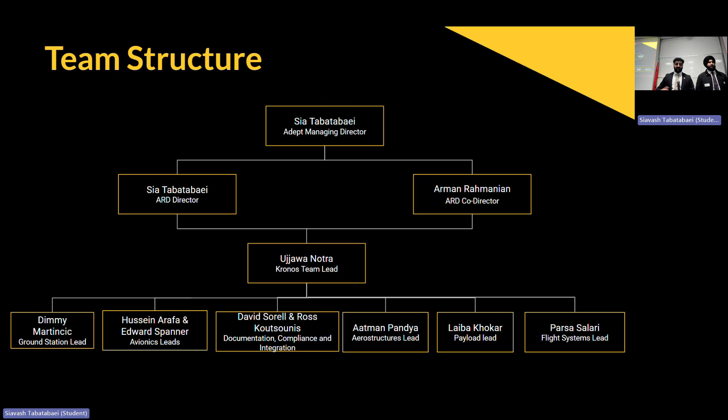So a little bit of an update since you guys last heard from us. In 2025, we competed for the first time since 2019 in the Australian Universities Rocket Competition. We're pretty proud of our performance. We came 4th place in 2 categories. So the rocket that you see behind me and the rocket at the front, Project Myriad and Project Lightning, were our 2 entries into the competition. Both categories, we came 4th place. I should note, we were coming 2nd place up until launch. The reason I say that is it reflects our team's capability, and the one part that is particularly resource intensive in terms of investment into actually building the rockets, that part we're still learning, we're still improving.

We also walked away with the Lockheed Martin Technical Excellence Award. Again, really speaking to our team's technical capability in presenting their work and being able to talk about what they're doing, and also following engineering industry standard practices and processes. Since then as well, we've grown, we've doubled in size. So from around 40 active members, we now have 80 active members.

And our big focus this year is formalized engineering processes. So taking our learnings from last year, all of the little intricacies of running a large scale project, figuring out how we can improve those, and allowing our team to walk away with real engineering processes and documentation and simulation and analysis skills, rather than just saying, yep, we're building a rocket, it's a tube, it's got a nose cone, let's launch it. So we want our team to really have that employability behind it. Some of the photos here you'll see are Project Myriad in action. And yeah, very, very happy team.

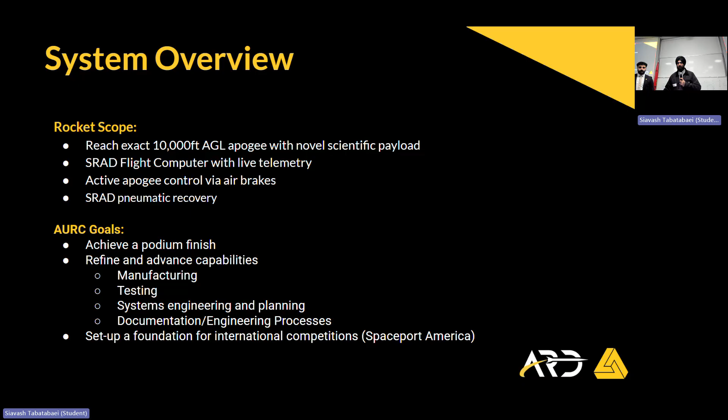So introducing Project Kronos. As you can probably see, the main geometry and dimensioning is very similar to Myriad from last year, but we are planning on adding a boat tail, a metal nose cone tip, and a different fin shape to get us to that extra apogee. And now I'll move on to the subsystem review.

So aerostructures this year is mainly focused on implementing industry-standard manufacturing techniques. Flight systems, which encompasses our air brakes and recovery, are working on developing a working altitude control, and recovery is working on making an SRAD pneumatic recovery. Avionics is working on, sorry.

Quick question on terminology. SRAD? Oh, sorry. Student Research and Development. Thank you.

Avionics is working on a student researched and developed flight computer. Ground Stations is working on live telemetry capabilities, which are new this year. And Payload is also working on an SRAD scientific payload, which is being developed in-house for the first time. Now I'll hand over to Aerostructures.

Oh, sorry, ConOps. So just to walk through the concept of operations. So generally in the AURC 10,000 feet category, we take our rocket to the launch pad and activate the avionics. This installs the igniter to the motor, and once continuity is checked, the motor ignites and the rocket launches.

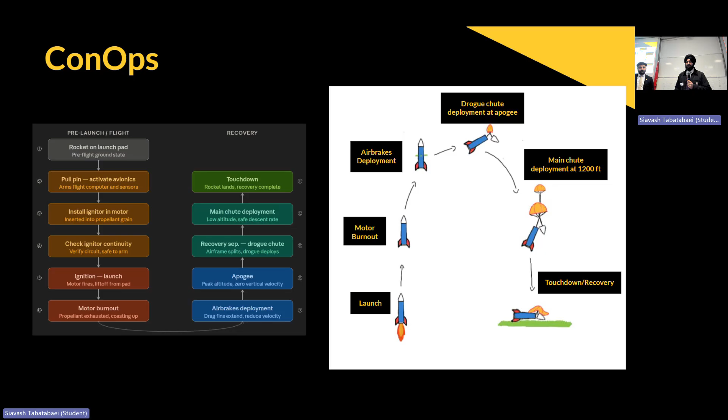So guys, I'm Aatman, the team lead for Aerostructures, and I've got Urvi and Noah next to me, who are members. So for Aerostructures, we started off with the system requirements from AURC, which are our external system requirements. This would include some safety stuff that they want, such as the touchdown velocity, the rail departure velocity, the aerodynamic stability margin for the rocket, and the mechanical safety factor they expect us to use.

We also have internal system requirements, such as the internal diameter and the motor class that we're using. These are mainly due to us reiterating on the design from Myriad, and this will allow the other subsystems to start their design process earlier on due to some consistency between Myriad and Kronos.

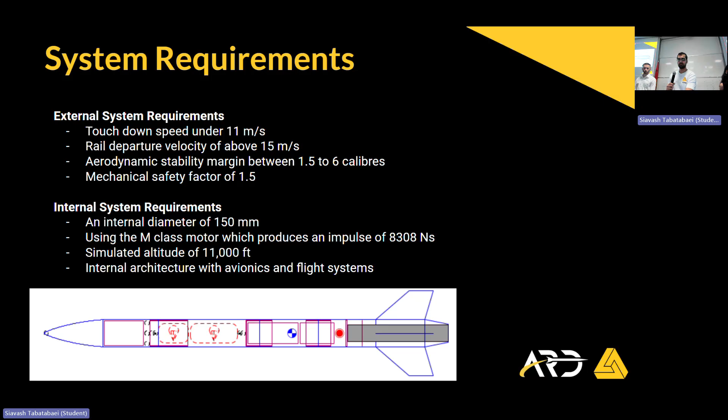So if we have a look at the system overview, I've just got a few dimensions that are constraints for the subsystems to adhere to. This allows us to package the rocket before we start going into the manufacturing phase, and this is supposed to be like a largest value you can go to. So they can optimize it further, and we can get the rocket down to be shorter. But yeah, we also have a boat tail for this year, which is supposed to be reducing the low pressure drag from the end of the rocket.

For the flight profile, when we launch, the rocket motor ignites. This gets us to apogee. At apogee, we have the separation event with the coupler system, and a drogue parachute is released. A drogue parachute is basically just a parachute which is smaller. Therefore, it increases drag, but not to such an extreme position where the rocket can fly away further from the launch pad. Then at a certain altitude, we deploy the main parachute. This main parachute is supposed to be increasing the drag overall, so it lands at the certain velocity that we require.

So in terms of manufacturing, we've come up with distinctive methods for each part of the rocket. For the nose cone, we'll be 3D printing a split mold that will be sanded and waxed from the inside to make sure it's smooth. Then the female component of the mold will be fiberglass, and that will be a separate layer, and then epoxy will be added on. So there's 2 separate layers for it. The male part will then be added on with a vacuum bag to make sure there's no air bubbles left or any voids.

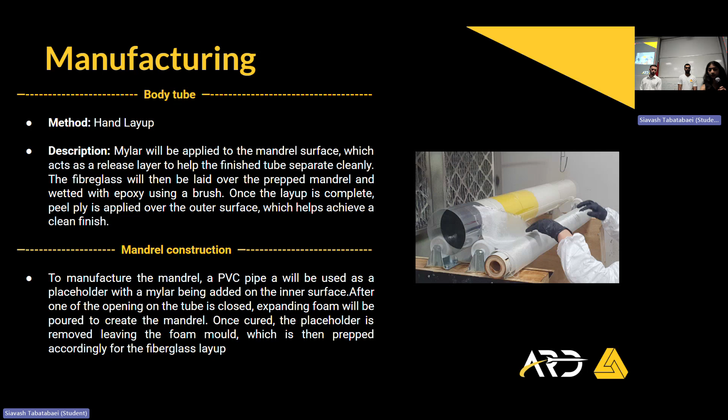Now, fins are one of our major differences from Myriad this year. We're going with trapezoidally swept back fins. And we have 2 iteration stages that you can see up there. We originally decided to go with an aluminium honeycomb core structure, which will have either an MDF or plywood frame that will be tip-to-tip reinforced. But a major issue with this is that aluminium honeycomb is extremely hard to shape and bond. So this increased the chances of manufacturing inconsistencies in our design, which we obviously do not want.

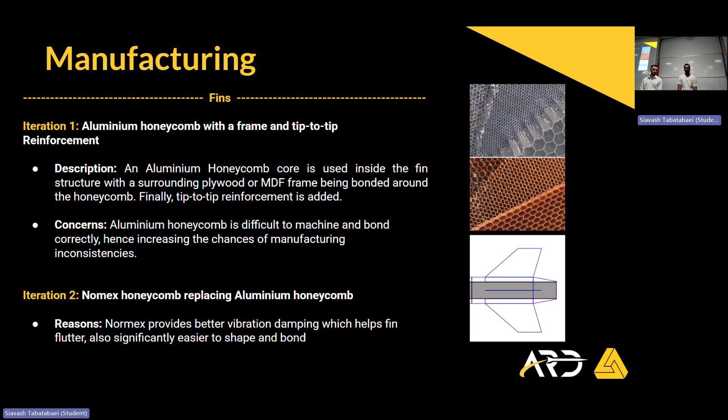So as an alternative, we came up with Nomex, which still has the honeycomb structure, but it's a lot easier to shape and bond as compared to aluminium. It also has better vibration damping, which helps with the fin flutter.

Moving on to centering rings, we'll be using MDF sheets that will be laser cut to our design. And finally, for the bulkhead, we'll be going with CNC routing. So a CAD model that includes all the through holes, all the U-bolts, avionics wiring, recovery harnesses, and everything will be CAD'd up. Once that's been done, we'll be using aluminium 6061 to manufacture the bulkheads.

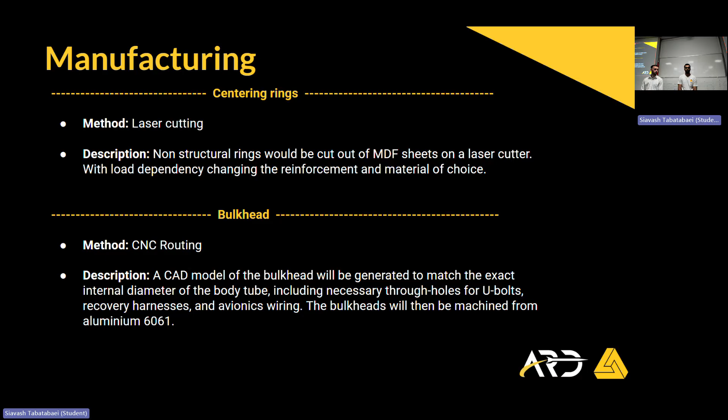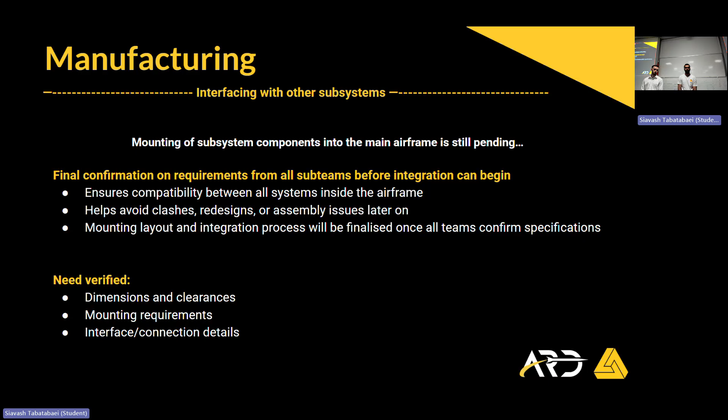Now, in terms of how we're interfacing with the other subsystems, to be able to actually confirm our method of interfacing, we need confirmed dimensions and clearances from everybody. We need mounting requirements and interface and connection details. So once that's been finalized within all the other subsystems, we will finalize our method of interfacing.

Now, finally, the major differences from Myriad to Kronos this year. As I've mentioned, we've reduced the wall thickness from 5 mm to 3 mm. We've had other rocketry teams that have used a much thinner wall and still have succeeded in it, so we're hoping that works for us too. The fin shape and material: as I've mentioned, we're going with swept back trapezoidal fins this year with a honeycomb structure. And again, we have a boat tail.

In terms of manufacturing, we're introducing vacuum bagging, which we haven't done previously, so that's something exciting. And you would have noticed in our OpenRocket file that some of the parts are rearranged. This is because as we're going with single separation deployment, our parachutes have to be adjacent to each other. Therefore, the avionics bay and air brakes have had to move aft.

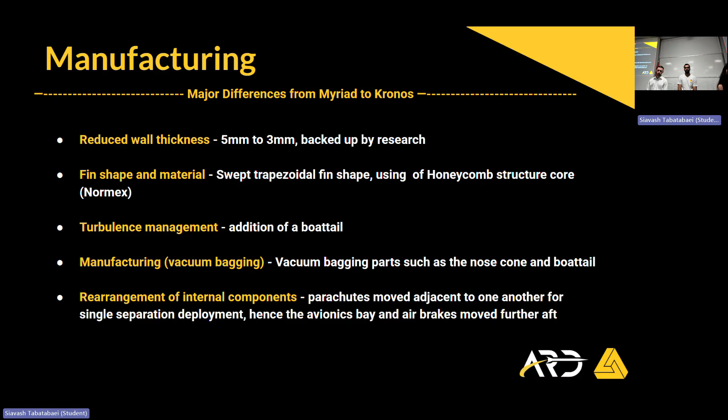For simulation work, we're going to be using ANSYS as the major package with Fluent and Mechanical and Composite PrepPost. The ANSYS Fluent campaign we're running will mainly be focusing on the camera mount, because we will have an internal camera pointing towards the air brakes. This will allow us to see how the air brakes are functioning, the input versus the output itself. We'll also be looking at the airflow from the camera mount and how that affects the air brake system as well.

For the boat tail, of course, we need to check how effective the boat tail is in reducing the low pressure zone behind the rocket. And we'll also be investigating how side slip affects the stability of the rocket.

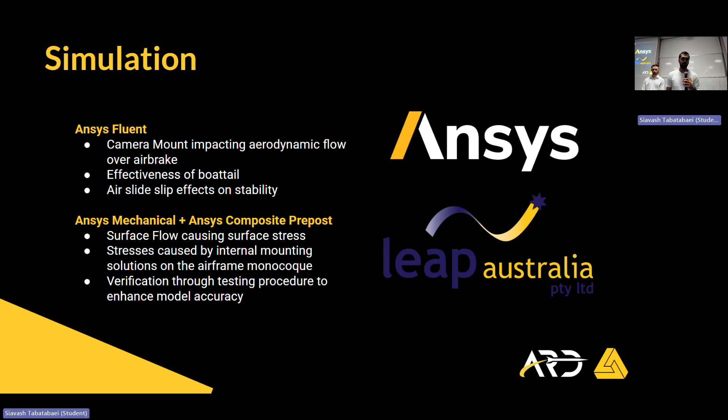For the Mechanical and the Composite PrepPost campaign, we'll be running a surface stress comparison using the CFD model to simulate the surface flow. Then we'll also be looking at how the internal mounting solutions per subsystem affect the overall stress on the airframe monocoque. We'll also be verifying all the mechanical processes through testing.

Right, so for physical testing of the rocket, there are 4 main components we're going to be testing: the aluminium tip on the nose cone, the internal bulkheads throughout the rocket, the fins, and the airframe couplers. For the nose cone tip, we are going to be doing tensile testing just to make sure that the forces we experience during the flight and separation with inertia, we can actually handle based on the adhesion that we apply to it.

In terms of the bulkheads, we'll be doing compressive testing internally to make sure that the actual force from the motor doesn't affect it and it actually maintains its position in the rocket. And then also importantly, tensile testing on the bulkhead near the nose cone, because during separation, we want to make sure that the bulkhead maintains its position during the force that we will be experiencing during that separation.

Now, for the fins, we're going to be running cantilever testing to make sure they can handle the forces we're expected to experience during the flight. And for the airframe couplers, we're going to be running both compression and tensile testing to make sure that during the flight, when it's going up, we can actually maintain the compressive force. And also during separation, we will not be worried about the tensile forces there either.

A few project risks for the sub-team are manufacturing complexities causing time delays. This can be mitigated by using smaller scale manufacturing initially to iron out all the manufacturing processes. Then we also have an integration challenge with the sub-teams due to time, basically. But we'll be starting discussions after the CDR is concluded, and this will allow us to design everything hand in hand so integration is as quick as possible.

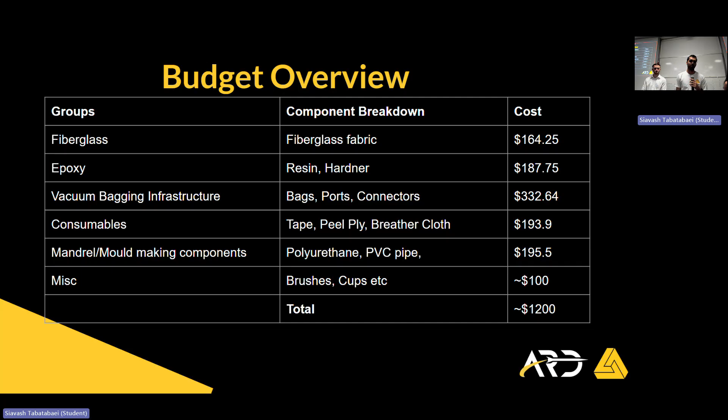A quick budget overview. Yeah, majority of the pricing is just on materials such as fiberglass and epoxy. A new category within the budget is vacuum bagging infrastructure due to us not really having that right now, and also the consumables that go alongside it. However, the mandrel making process seems to be fairly cheap for us right now.

To measure performance within aerostructures, it's pretty simple, I think. Basically, we need to meet system requirements like all good engineers. We need to make sure that the integration side of things goes as smoothly as possible. We need to establish good manufacturing capabilities that we can pass on to the next year and ongoing years.

And then as ARD is a student-led team, education is always a goal of ours with transferring knowledge to newer members, and exposure to engineering experiences not found in university courses.

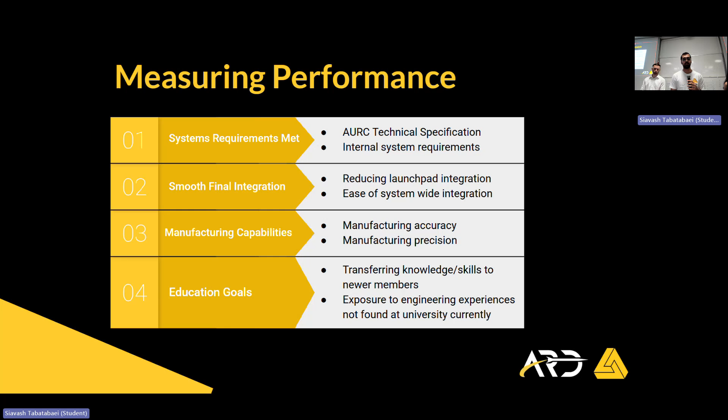If you just run through the decision, we're going from 5 millimeters to 3 millimeters on the body. Yeah, so when we were researching a lot of the airframes that other teams use, especially in Spaceport America, a lot of them were running either 3 millimeter airframes or 2.5 millimeter airframes. So we're trying to see how effective that would be with our current manufacturing technique and seeing if we can refine it further to get the necessary strengths we're looking for.

What's the advantage of going to that? You get more altitude, things like that. Yeah, so basically a simplistic way of dealing. I mean, you can if you want. So the safety factor on the 5 mil is a lot higher than it needs to be, so it's adding a lot more weight.

The issue last year obviously was that we didn't reach altitude to begin with. And that was due to weight, you think, rather than a difference in the thrust of the motor? So the thrust in the motor hasn't changed. Okay, so that's fixed. Yes. So as the motor is a fixed parameter, the most appropriate thing to change is then the weight of the overall item. So we've reduced the overall thickness because we have the flexibility in the safety factor that was originally applied.

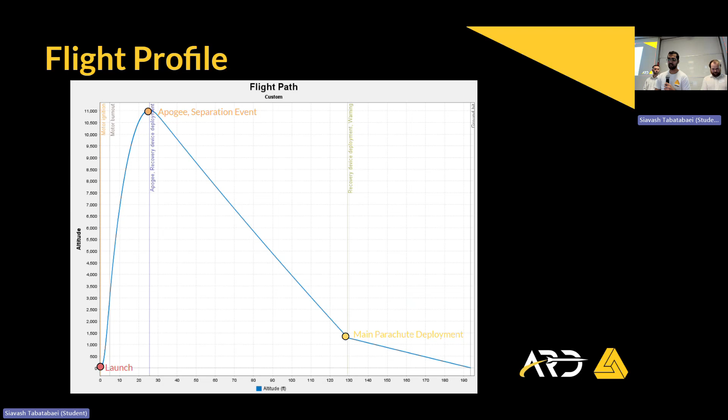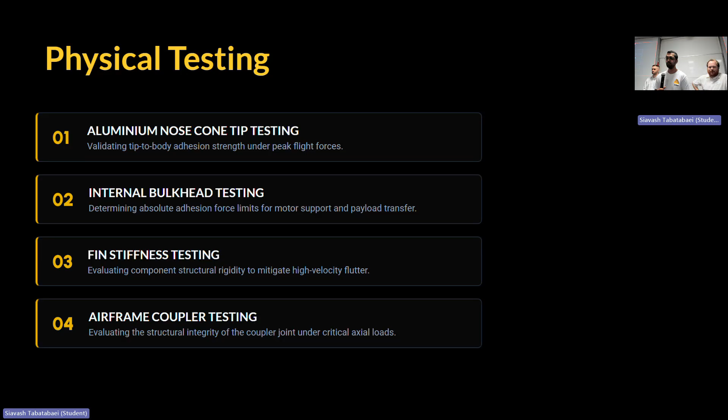That's a mistake on my part. But for Myriad, we were using a lot of pins in shear forces, but right now we're transferring to... Okay, so I'm not talking about joints or interfaces. I'm just talking about the overall airframe. So this is going to be in compression. Yeah. Due to the acceleration of the force and bending from wind loads.

So there's going to be a critical point along that tube for compression. Composites aren't great in compression. What's your margin of safety? How have you calculated that? Yeah. So the compression testing that the coupler will receive, it'll be the same material and basically the same manufacturing process that the airframe will receive. So we can interpolate those data points into how the airframe would be affected as well.

And so how do you account for bending in the worst case testing environment? Also the length of your column, any buckling. You answered my question, but that's a good question. In addition to the testing that we'll be doing, we're also going to run FEA and CFD analysis on the parts that we think are likely to buckle or have a stress factor that's not good for our rocket.

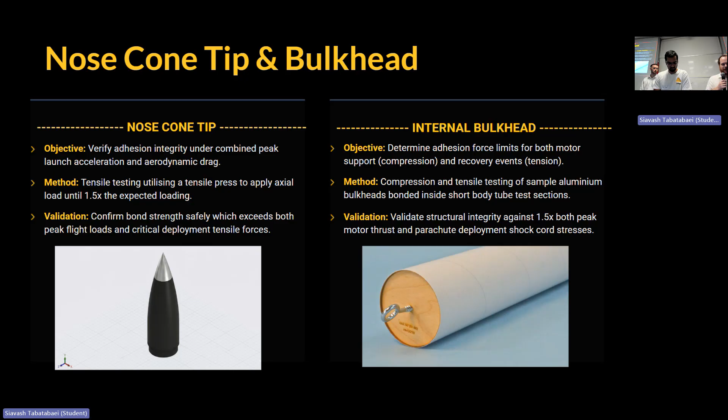Here's a quick question. Do you guys have an idea of how much weight you're going to save? This will most likely be after the manufacturing run's been done, because we haven't estimated that. Not really, just because internal sub-teams also need their weight budgets to be calculated and then accounted for.

I'm curious, why did it seem like you simulated an altitude beyond where you need to get to? Can you explain to me why you do that? Beyond, as in the air brakes. So the intent is for the air brakes to be used, and this will be explained later how specifically that works. But essentially, we've intentionally over-projected our altitude so that we can rely on drag to get us to that spot.

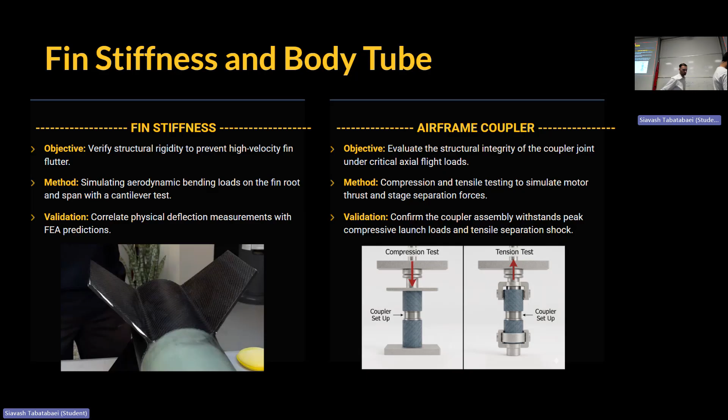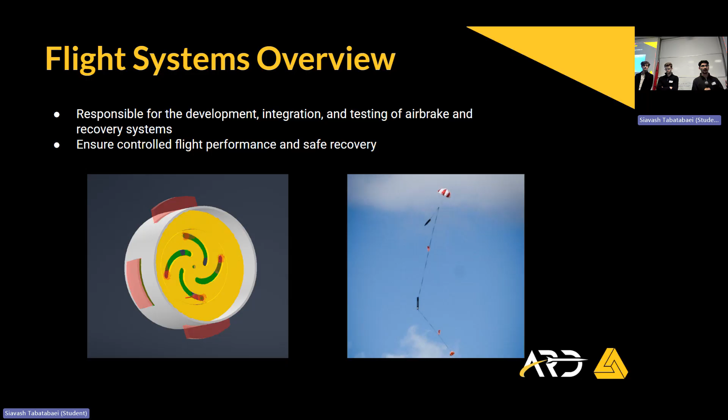Great, thank you. So when we launch the rocket, obviously we have a lot of variables which we can't account for. You've got low and high pressure of air, you've got pockets of wind, you've got mass variability, and that all leads to quite a large apogee variation. So that's something we can't control before we launch the rocket. So to tackle that, we're going to use an air brake system, which is where we have an onboard computer, which takes a variety of variables into consideration, and will deploy fins mid-flight to spend that excess energy that we have because we overspec the rocket to go higher than the 10,000 feet target.

So to tackle this from a software perspective, we're building a predictive system, not a reactive system, so not a PID system, where we're looking forward and predicting how high we think we're going to go, and then making choices depending on that. So we've got the gather data, process and predict phase, and action phase. A lot of it is built on getting our current position and the current situation the rocket is in. Hopefully we'll be projected to go higher than our target. And then we do a lot of calculation to figure out the amount of drag force we need to apply to lower that to where we want to be, which is our target.

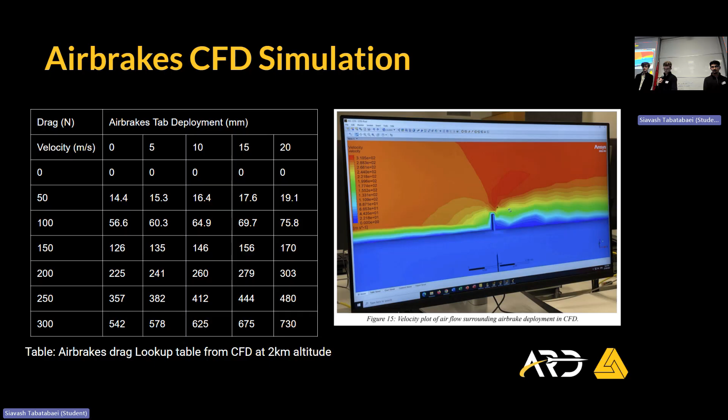So the mechanical implementation, we're using a radial cam track mechanism, which has a rotating disc with curved slots, and it's pushing the air brake tabs out, which have pins. So the path of that curve has specifically been designed to deliver a linear relationship between the servo angle, which drives the mechanism, and the tab deployment. So this reduces firmware complexity, gives us one less place where errors can occur.

Parsa's got the demonstration there. So it also guarantees equal deployment of all 4 tabs at once. So we're not going to have any lopsidedness, we're not going to cause any spinning or any offset. Because we have one single motor input, and as long as nothing jams, everything should be deployed equally. This attribute and the simplicity of the design is why we chose it over alternatives like a 3-bar linkage system. So that's the air brake mechanism and software.

I'm going to hand it over to Parsa. One thing that we did with Project Kronos is to look at our 2 previous experiences in air brakes, which was Project Lightning and also Project Myriad, and derive all of the best things out of it pretty much. So one thing that Project Lightning had over Project Kronos was having its own outer aerostructure, which we're doing here. So the air brake system will have its own housing that has an outer diameter of 156 mm, and with a full deployment, this diameter is changed to 216 mm, providing us with 30 mm of full deployment of the tabs, which compared to last year, is close to 150 times more deployment.

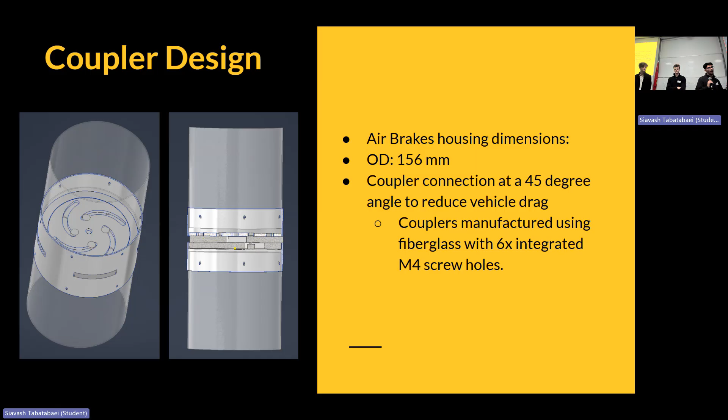The airframe of the air brakes is mounted to the coupler section at a 45-degree angle to the connection bolts to reduce the rocket's drag, as a 0-degree angle would introduce extra pins outside of the rocket. So the couplers are going to be manufactured using fiberglass, and the thread inserts for them are going to be placed and then epoxied in. The housing itself is going to be made out of aluminium 6061. I will now hand to Charlie to explain our safety mechanism.

Right, so AURC requirements dictate that we need to have some kind of mechanism for the air brakes to retract in case of a power loss failure. We had two primary ways to go about this: an electrical backup using a capacitor and a mechanical backup. We've chosen to go for the mechanical backup because it is more comprehensive. It deals with a broader range of failure modes such as controller board failure and the servo wires becoming disconnected. However, due to the limitations in our servo motor, we needed a system which did not fight the servo motor during standard operation.

So if you go to the next slide, we are using a locking mechanism with a normally open solenoid, which will keep these sliders, which retract the air brake pins, away from the areas where the air brake pins will be during standard operation. Should power be lost in whatever way, or the controller board fail, the solenoid will lose power and that pin will retract from the holes in the sliders, and they will retract under the linear spring tension, pushing the air brakes in.

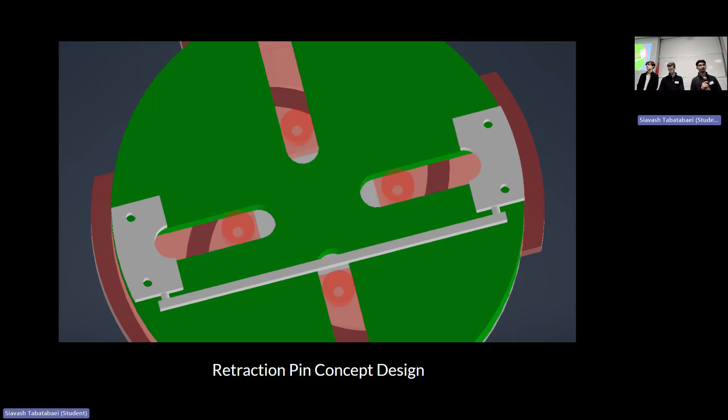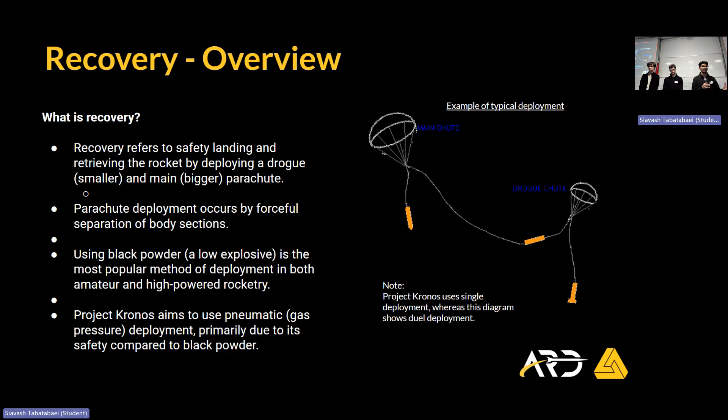We'll now move into the recovery side. A brief overview of recovery itself. So recovery refers to safe landing of our rocket using a drogue chute, that's a smaller chute, just to give guidance to the rocket and reduce the drag to some extent, and then a bigger chute that is set to be deployed at 1200 feet. Parachute deployment happens by a forceful separation of the body itself, traditionally using black powder, but we are now exploring gas options, hence our pneumatic device. I will then hand over to explain further on this.

So some of the reasons why we're choosing a pneumatic deployment system over a black powder system is mostly because of safety concerns. Although one of the pros of black powder is that you can measure the exact amount you need, whereas for the canisters, we have to buy default amounts since we're buying the canisters from the store. And also testing under university guidelines, the canister is so much easier than black powder. The university are very difficult about testing black powder. And also black powder ends up charring and causing some damage to the internals of the rocket, and the pneumatic should not.

But we haven't done this before, so that is why we want some help in deciding which one we should do. So once the rocket reaches apogee, it'll hit the first stage, which is our design. We are picking between an E-match with a little bit of pyro, and that is pretty much the same as the redundancy one here that we just buy the COTS version. However, and they'll explain further later, the 38-gram canister isn't enough to separate the rocket. So we're designing one with 45 grams, and if that's not enough, a 74-gram canister.

And then the second one is using a DC motor to release a spring, and then the DC motor will turn a latch that will release the pin, piercing it. And then finally, to deploy the main chute, we have this TD-2 tether and release device. There's a little video later, but an E-match pretty much releases that, and that will release the main chute.

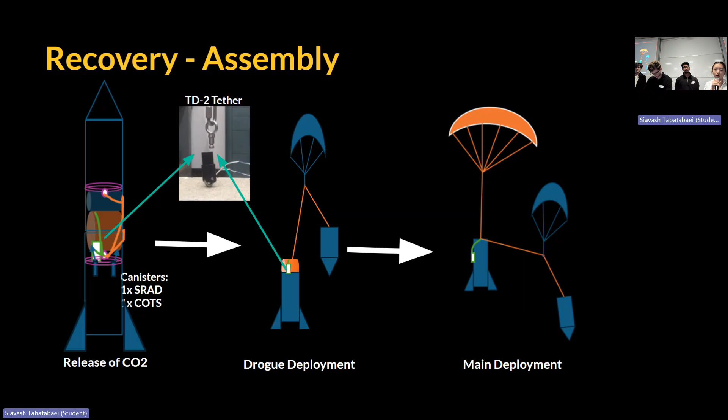This is our assembly diagram. I've just put that up there. So the green thing there is the tether release device. The parachutes are packed, and then after the CO2 releases, there's the drogue deployment, the small parachute deployment, and then the main one will happen after. I will further expand on this a bit more on the prototype that we've got at the front.

So as you can see, this is the main bulkhead that we use, and the red option is the commercially off the shelf, so COTS option that we purchased, and the grey one is the one that we are planning on making our own, our SRAD version. So at apogee, where we've got drogue deployment, we will have either of those deploying our coupler outwards, and the drogue is connected to our main eyebolts.

The main parachute itself, the carabiner for it is connected to the tether release device that is also connected to the main eyebolt. So once this device is released, it will enable our main chute to deploy. Just see the ground bit there.

Now the options that we've got for our SRAD pneumatic design is either a DC pneumatic or a similar system as the one that we purchased. So the DC pneumatic has a preloaded spring placed right over there, but is then opened with a DC motor connected to a latch that enables the pin to pierce through our CO2 canister and enable the gas to come out. I'll hand to Stefan to explain the pyro option.

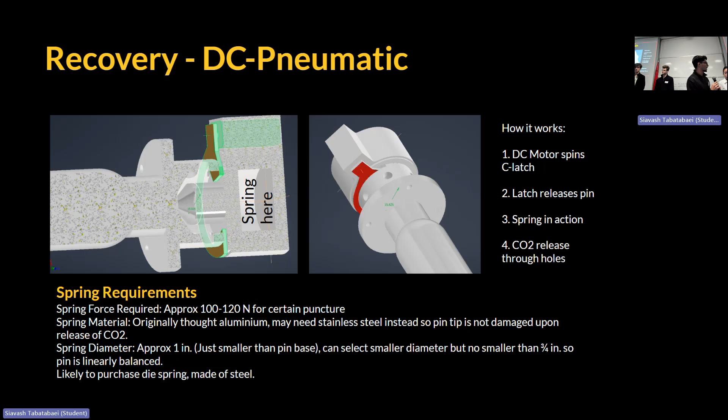So the pyro works pretty similar to that one. Essentially, a charge cup at the bottom is going to hold about 0.3 grams of the pyro charge. Then ignited by an E-match, it pushes the pin forward, and that will pierce the 45 gram CO2 canister. We're also buying these canisters, we're not making them. And then we'll have a compression spring which sits between the pin and the CO2 canister, which will retract it, and the air's forced out of those holes on our casing.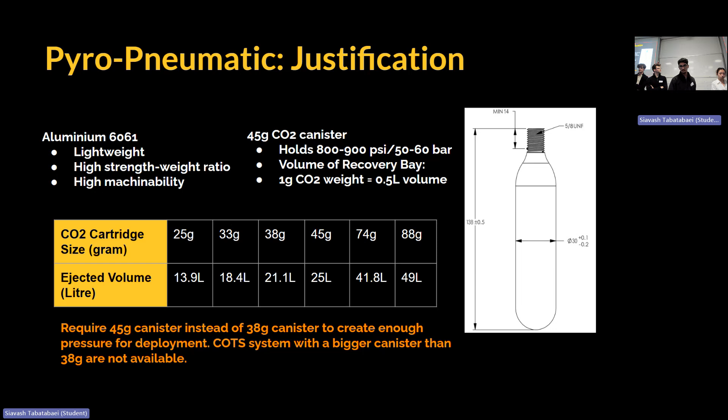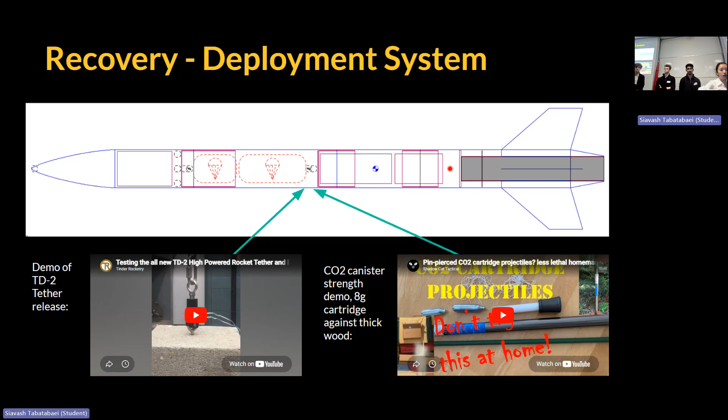So the other option was to use an MDF disc to minimize the volume. It'll go right before the parachute area, just on the right side of the big parachute there, that's where the disc will sit. And so using the 38 gram COTS canister should be able to create enough pressure in a smaller volume to push the parachutes out.

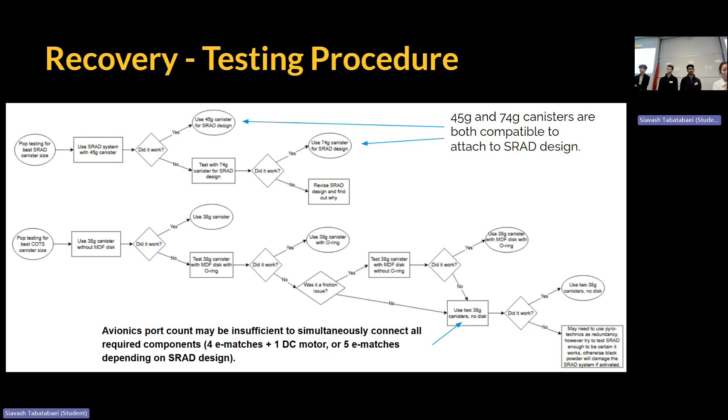But the issue with that was whether or not we needed an O-ring for that, but that's just a matter of friction. But if it didn't work, the issue was that our SRAD CO2 canister might be too powerful to be using in a smaller volume. So it's kind of a testing process, and if anyone had any extra commentary on that, that would be good.

As for our risks and mitigations, I'll start with airbrakes itself. Failure to deploy we aim to test by ground testing and sample validation. The other one can be over-deployment, which our state-gated logic limits. We can have mechanical jams that we aim to prevent with correct tolerancing and deployment testing. But the most important one is power loss, which we've further explained, that we prevent using our mechanical safety

mechanism. For our recovery, parachute deployment failure, hence having a redundant commercial off-the-shelf option, and section separation failure. That is the reason that we do pop testing, so ground testing before flight. And we may have electronic failure, but we do have redundant electronics available, which avionics will further explain.

As for our project timelines and milestones, we are sitting at CDR, and our manufacturing starts 1st of July, aimed to be 1st of June, aimed to be finalized and finished early July, mid-July, and the rest would be our testing procedures in action. Questions?

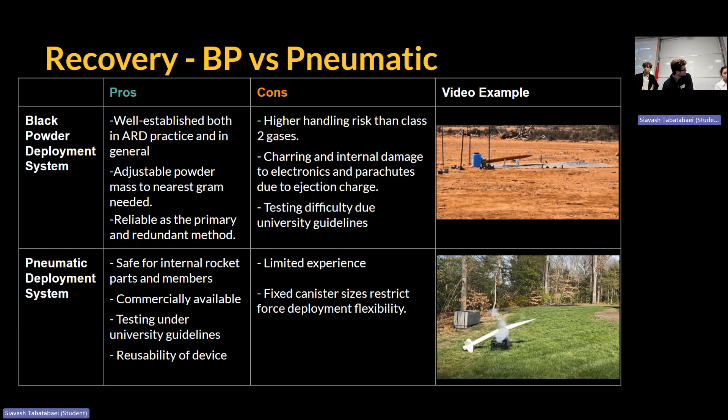So are you guys doing anything to prevent jamming when there is the force of the air that's bending your input? Yeah, so to prevent this, as you see in the design itself, we have taken this into consideration. One way is we calculated the forces when we were doing our initial calculations. According to our simulations from last year, close to 50, maximum 50 newtons of force is applied on all 4 airbrake tabs. Hence, by knowing this, we reverse engineered the static coefficient of friction that we need to have between our aluminium plates and tab system, and also our bottom holders,

which is 0.4 as a coefficient, choosing SLA printing, resin printing, as our base. That prevents this jam from happening a lot. And also the design itself utilizes ball bearings that reduce the friction between the pins holding the movement track in place, preventing this action. Thank you.

Is all of your mounting 3D printed for the CO2 containers? Is there any risk of the containers disconnecting? They seem to be connected just at the thread. Our mountings for our SRAD pneumatics are all aluminium 6061. It won't be 3D printed. The design that we've got is just for show. It's a 1-to-1 scale prototype of it.

So all of our design at the moment, except for the pin itself, is aluminium 6061, and the pin is going to be steel, or alloy steel, because the aluminium is going to be too soft for when the canister gets pierced. The pressure might ruin the tip, and it just wouldn't be a reusable system.

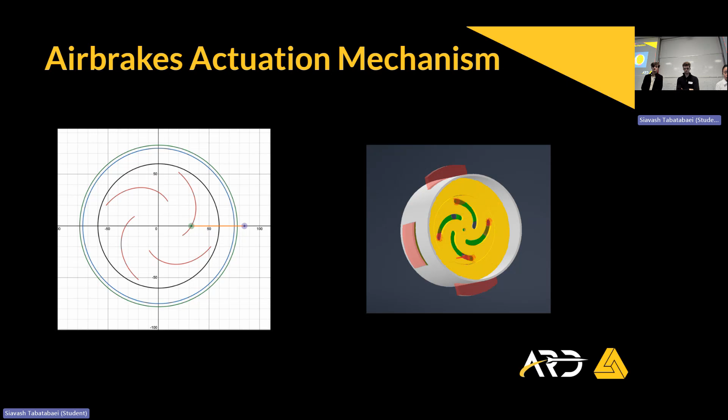Is this for air brakes? Because you did mention air brakes. Okay. The tabs popping out. Yep. So one thing that we can do to prevent this is using that safety mechanism that we have. Hitting apogee, we can send a signal to close this, have it retracted, because the servo motor will be completely retracted to its neutral position. And we can also take advantage of our safety mechanism being actuated and holding them all in place. If that answers the question.

Yeah, I think Charlie has asked whether you've had a look at the limit load that would be required to effectively break that safety mechanism. The safety mechanism is in its preliminary stages. We were looking at a different configuration up until recently, so there is still a lot of work to be done on it. I have looked at the static friction loads, and the springs are capable of handling them. We will be doing extensive testing on their capability.

And the dynamic pressure difference, because at your maximum velocity you've still got quite a dense amount of atmosphere around you. So you're not going to have lost a lot of that pressure inside your vehicle, but your slipstream will be at a much lower pressure. What's to stop early deployment because of the pressure differential?

That will need to be tested. We can calculate that. Do you want me to hand this over to you? Yeah, that's a really good question.

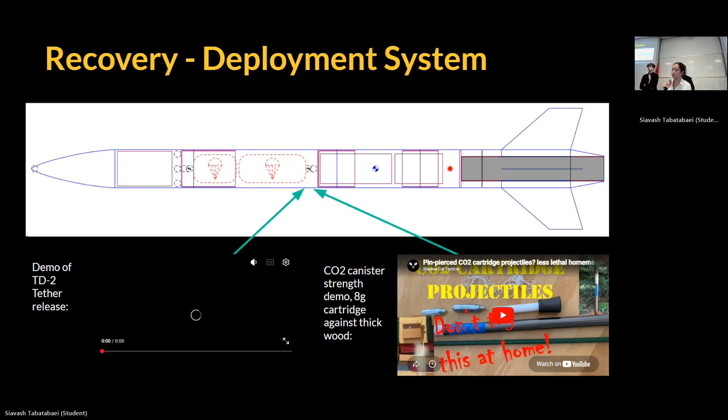Since no one has a question, I just wanted to quickly go back to this. Not expecting an answer now, but if people could have a think about it and maybe come to us during the break. As I said before, we're not sure if we should do a pyro-pneumatic SRAD or a DC SRAD. And also, if we did an SRAD, we could have two 38-gram canisters, because I think the preference is not to use that MDF disc, but we might have to use it to increase the pressure.

But the issue was that if we had two COTS canisters and also our SRAD, and also the two E-matches for the tether device, I don't think avionics has enough ports for all of those. I believe they only have 4. To be honest, I don't fully understand this trade-off. It's probably not time yet. But are you going to test each of these options before you make a decision? That would be one way to gain confidence.

Yeah, so one thing about both designs is that they are the same dimensions, so they share the same canister sizing, same thread sizing and all. The addition to the new pyro-pneumatic is a casing on the side that holds our DC motor in place. And by adding the slots on the device itself, it will enable us to place our disc inside.

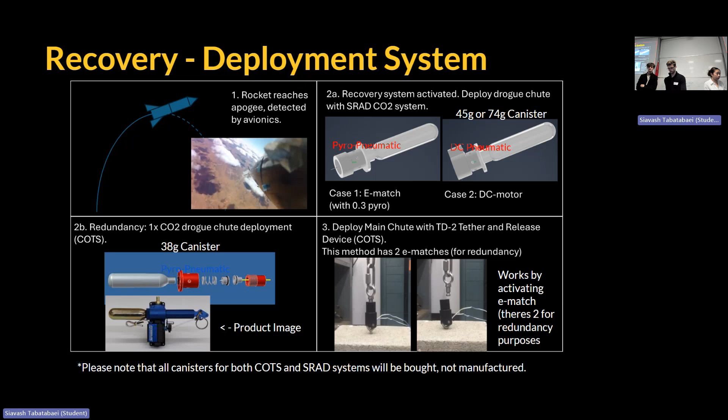In your failure mode, you mentioned no recovery going off. Have you considered early recovery? So you haven't reached apogee and for some reason your recovery system deploys. How do you plan to account for that?

As a safety thing, from previous experiences, there was always this high chance of having e-matches activated and having earlier stages of recovery, which is a really good question for avionics: how do you aim to reduce this factor and prevent this, given that our system itself cannot be actuated, or the pyro going off without electricity or an electrical charge in our e-matches itself.

Yeah, avionics will run through this in a bit, but they have a state machine which will be running to ensure that things can't go off when they're not meant to. So that's how we deal with that.

Yeah, my question here: I noticed Sarah's question around timing of failure is quite interesting. Looking at subsystem or system design, quite like an FFA or a functional failure process that has keywords around too early, too late, wrong message, that type of stuff. Also, looking at your table here, maybe it's a broader question around your risk management. Why don't you break down your decision flow diagram? Is there a distinction made between consequence and likelihood in your risk management process? The combination of both of those actually gives you your risk, as opposed to just a non-credible event.

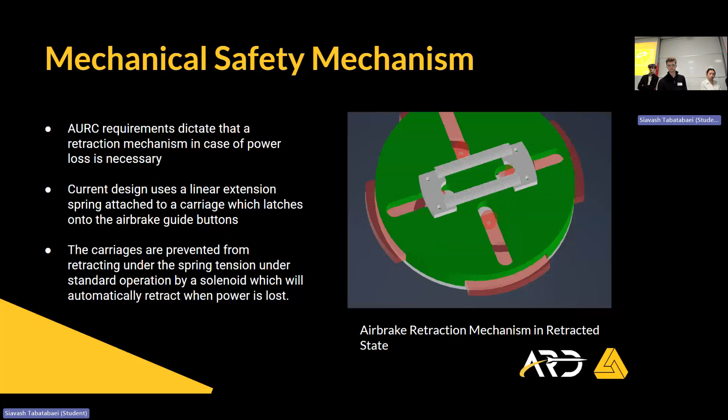Hi, just to expand on the previous question. So within your logic flow that's running the air brakes, do you have an active risk matrix that's running? Having prioritized risks before flight, that's something you can engineer out and go through the engineering hierarchies to get rid of as far as you can. But as for the risks that you're actually experiencing in flight, you mentioned that e-matches haven't been an issue with ARD. I believe there's some individuals in the room that will be aware of issues that have happened in the past with other teams. Do you have any processes in place to have mitigations within the code to avoid early e-match detonation or other avoidable functions that can be programmed?

Yeah, absolutely. I do the air brakes programming, so I can speak specifically to that. A major failure point would be early deployment, in that we deploy our air brakes early or too much early on, we lose too much energy, and we don't make the apogee that we want. So we've got a safety factor on board, where essentially we have a multiplier of our absolute deployment amount, and we scale that between our expected altitude from when our thrusters turn off to near our target altitude.

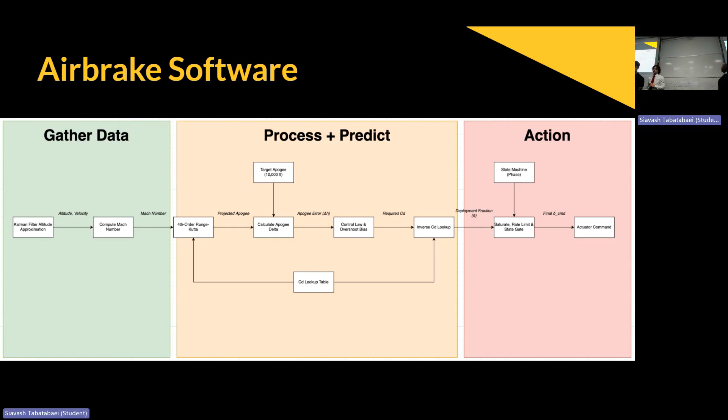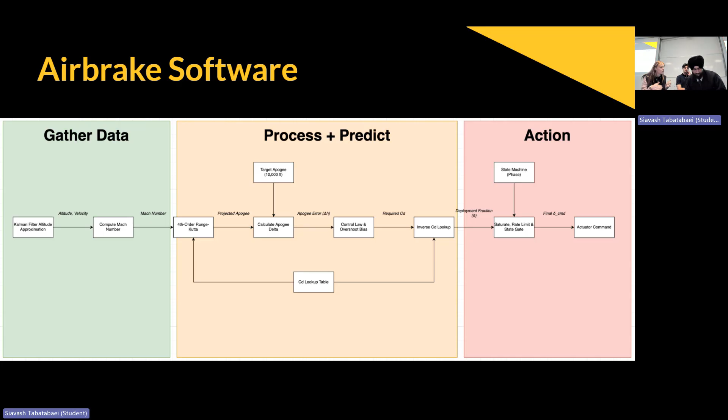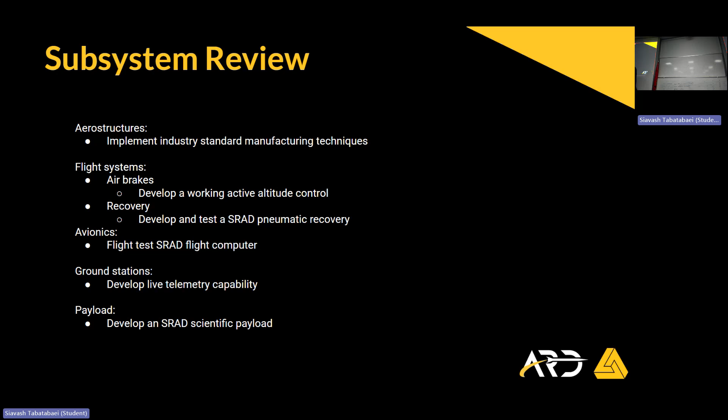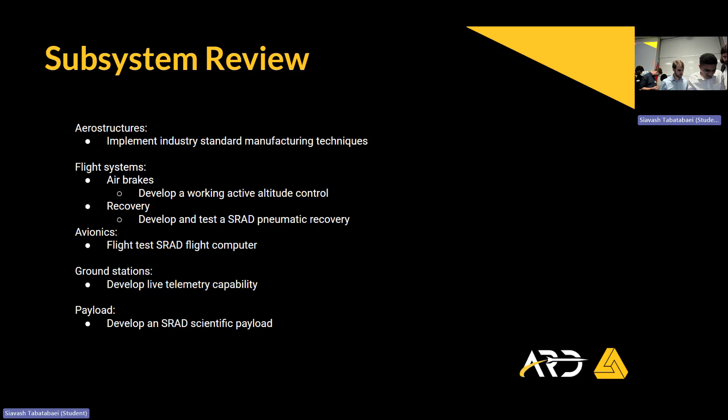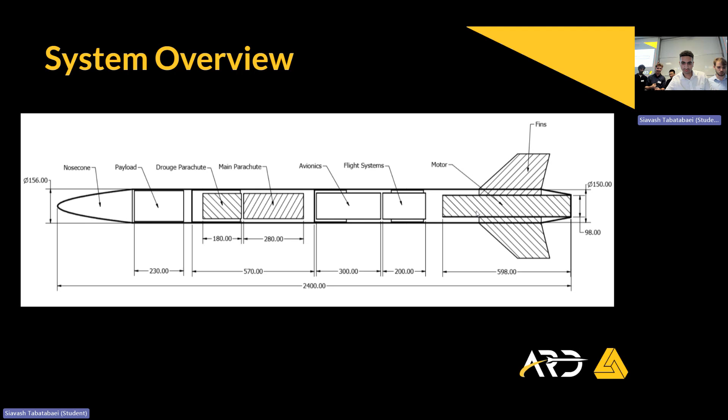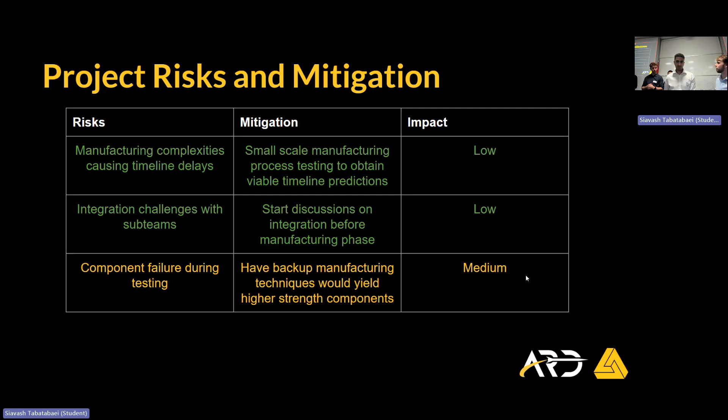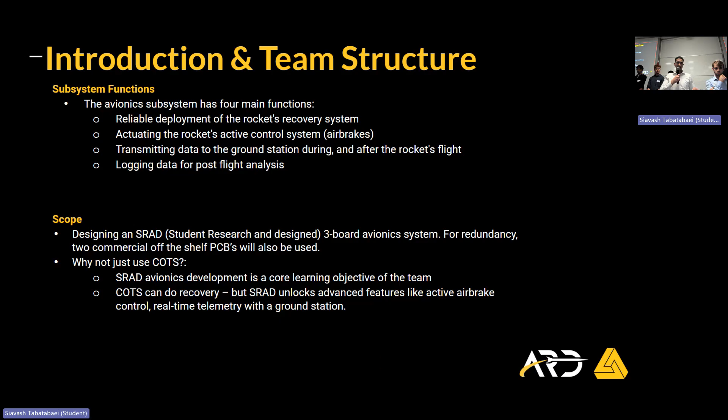So I'm going to hand it over to my team. Our team is divided into 3 subsystems: hardware, firmware, and the design of the avionics bay. And we'll explore all those different projects. So I'll walk us through a basic hardware system overview. Our hardware consists of 3 boards. We've got a power board, telemetry board, and a flight computer board.

So the power board interfaces with the batteries. We've got 3 18650 lithium-ion cells that come into that. We've got voltage regulators to bring it to the voltage that's needed by the boards and the air brakes, and the battery connectors, and arming switches, so that we can arm it on the pad, which is a requirement of AURC. This feeds into the telemetry board, which contains a GPS module for recovery, a 915 megahertz LoRa transceiver, and two antennas to allow communication between that and our ground station.

This receives data from the flight computer, which is sensors and main control unit. It has an accelerometer, IMU, and barometer on board, and it uses Kalman filtering to resolve its sensor inputs, and that feeds into the state machine, which drives the recovery and air brakes.

So for our commercial off-the-shelf avionics system, we've got a Blue Raven flight computer, which controls the parachute and recovery system, as well as a Featherweight GPS module for dual redundant recovery. Over to Callan to talk us through our power board.

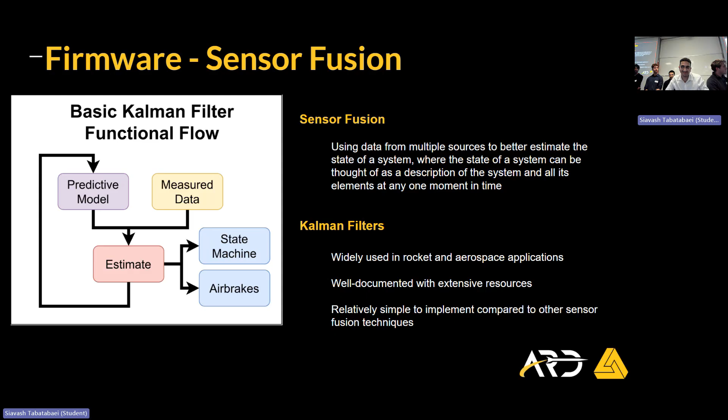So this year we're implementing sensor fusion as part of our system. Sensor fusion, for people who aren't aware, is basically taking data from multiple sensors and using them to create a much more accurate reading of the system. We've decided to use a Kalman filter for this, mainly because it's very well documented and widely used. There's also some open source versions of it, which we can maybe fall back on and compare with what we end up implementing. Yeah, next slide.

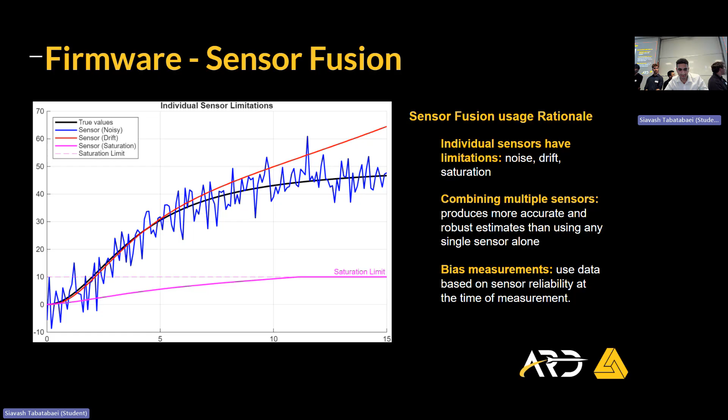Oh, thanks. So this is just the vague idea that a lot of times sensors have lots of limitations to them. For example, the IMU has a much lower limit to the G's it can read compared to the high G accelerometer. So our IMU would oversaturate during the launch, and so we would use readings from our high G accelerometer. So yep, go on.

Okay, so this is our plan at the moment. We're going to implement the standard Kalman filter. The idea is to get a real fundamental understanding of how it works. So doing software in the loop, testing it by looking at the convergence of residuals, as well as comparing it to OpenRocket data, and then using flight data we have from the Blue Raven from last year's launch.

Eventually we'll put it into the STM32 system, and after we've implemented that, we want to compare and see that it's been implemented the same as on our software side. So just the same kind of verification and validation methods. And then we want to do some basic sensor manipulation to look at how each sensor works, and then eventually do a live test of it.

The ultimate goal is to hopefully try and implement an extended Kalman filter. This is very complicated, so we're taking a very piecemeal approach of trying to reduce the complexity between steps.

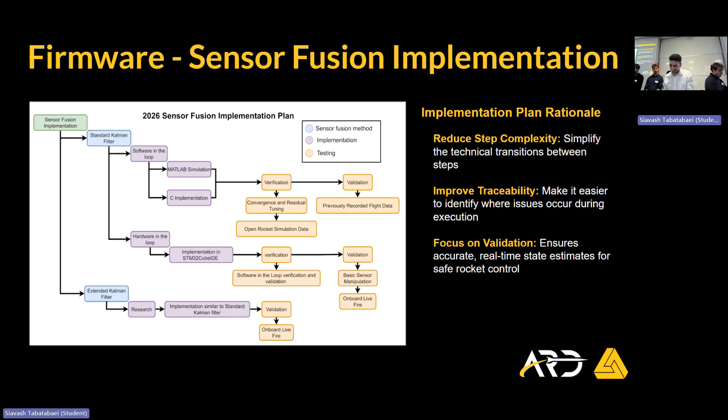The second is some sort of data loss failure between the telemetry board and the main flight computer. And essentially what we opted to do was to have a GPS module on our SRAD telemetry board so that it can keep operating independently and provide us with useful data even if we lose that data link. And the third was that our SRAD system completely fails. And this is a real possibility because SRAD systems are inherently unreliable, which is why we have that commercial off-the-shelf redundancy system to back it in case that happens.

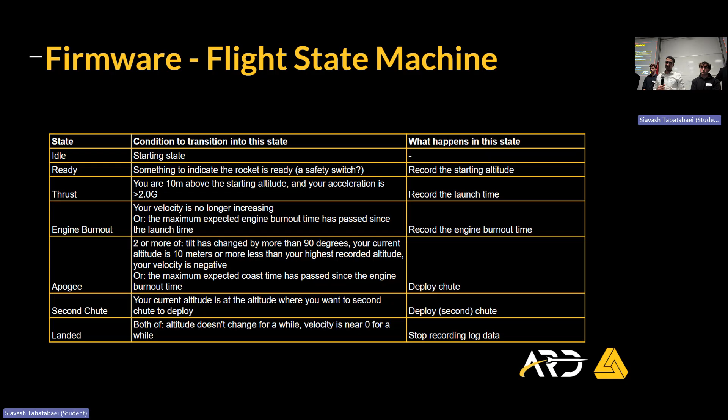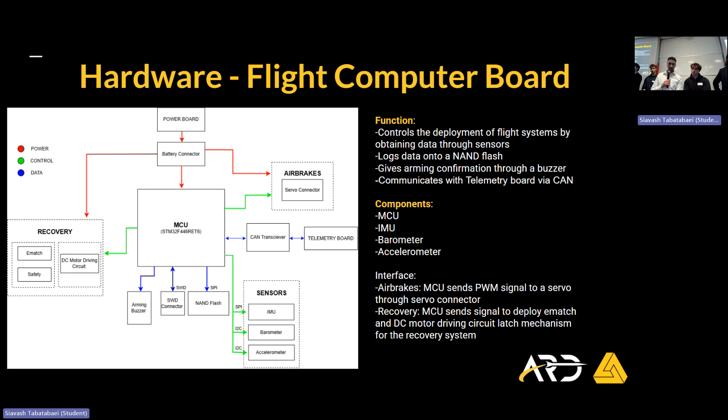I didn't see it on your block diagrams. I missed them. I think that's the orange one at the top. That refers to the telemetry. Okay. So, will that GPS need to have lock on the way up, or is it really only about recovery when the payload is coming down slowly? You know that once you hit speed thresholds and high acceleration rates, you'll lose GPS lock.

Yeah. The main purpose of having a GPS module on the rocket is so that we're able to recover it once it's landed. Because of the wind and all these different factors, the rocket can end up very far horizontally from where you started off. If you don't have a GPS tracker, there's a high likelihood that you've lost your rocket. Does the GPS feed into the Kalman filter? No, the GPS does not.

I'm going to ask a very simple question. You competed last year. How much of this have you reused? Is it a completely new design? The SRAD system is completely new. The commercial off-the-shelf components we've used extensively in the past. So we have used these two commercial off-the-shelf components, but the SRAD system is completely new. We have designed SRAD systems in the past, but this is a new system.

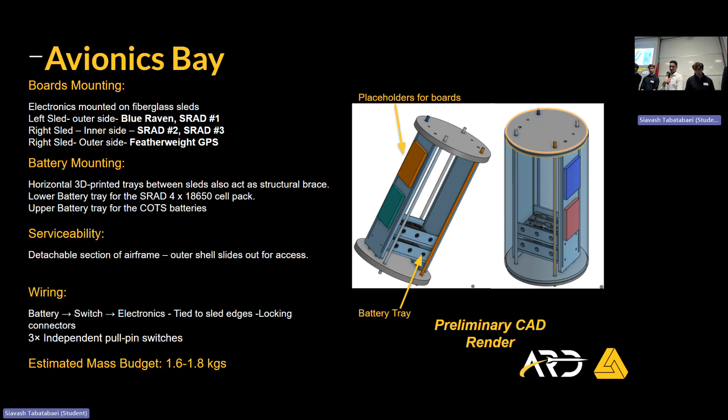Just spotted something. How many batteries do you have? Earlier you said 3 18650. So our SRAD system is powered by a 3S 18650 pack. But we also need to have additional batteries for the commercial off-the-shelf electronics. So the plan right now is to have two extra 18650 cells, so that they would each power each of these flight computers independently.

Because the whole idea is that your system needs to be completely independent. Your COTS system needs to be completely independent. That includes different batteries, different switches, different everything. That clears that up. Thank you. Yeah.

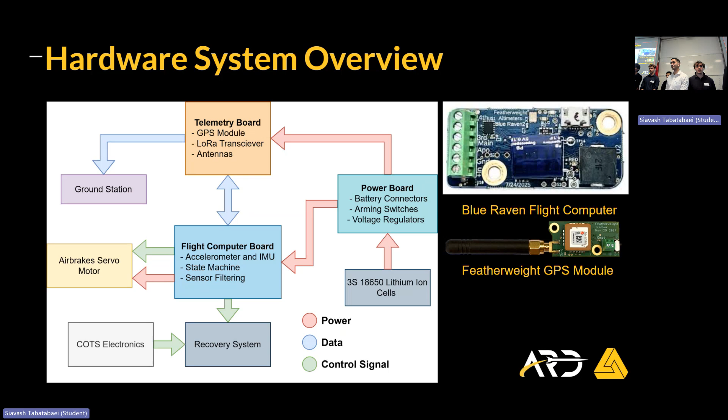I'm going to ask a quick question about the reverse polarity protection. I'm just wondering whether there's another way to solve the issue of connecting batteries. Because you've added an additional component that isn't actually required during the flight. It's really just protecting against that. I'm curious if you came up with any ideas to solve that.

So reverse polarity protection is something that is not incredibly difficult to implement in your schematic, but it's something that can go very far. The other way to get around it would be to have a mechanical failsafe where your connector physically won't plug in if you plug it in the wrong way. But based on the connectors that we've chosen, yeah, they're polarized.

We're using the Molex connectors for pretty much all of our power systems. So they're polarized anyway. This is just an extra fail-safe because last year we had trouble with reverse polarity, and it's just a MOSFET, so we aren't really stressed about the extra component and the design work involved. I think it has some time. If no one has any more questions,

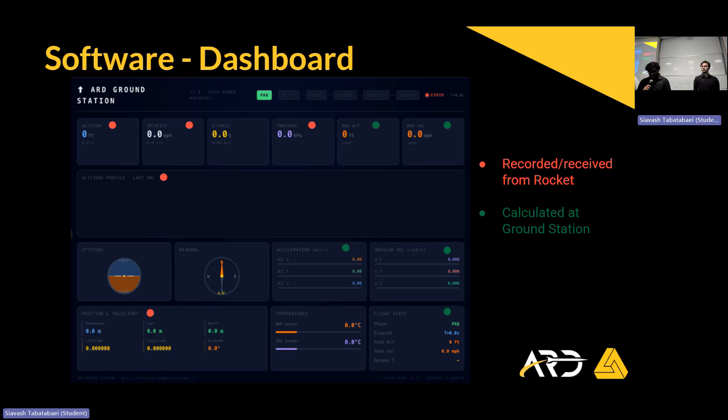So with all of this work, we need somewhere to show it. So we have decided to make a dashboard, something like this. This is a proof of concept model. We would get the altitude, velocity, attitude, and the pressure from the rocket itself, and the other values will be calculated at ground station, like the maximum velocity or the maximum altitude it reached. And then we would also have a 3D map showcasing the live trajectory of the rocket.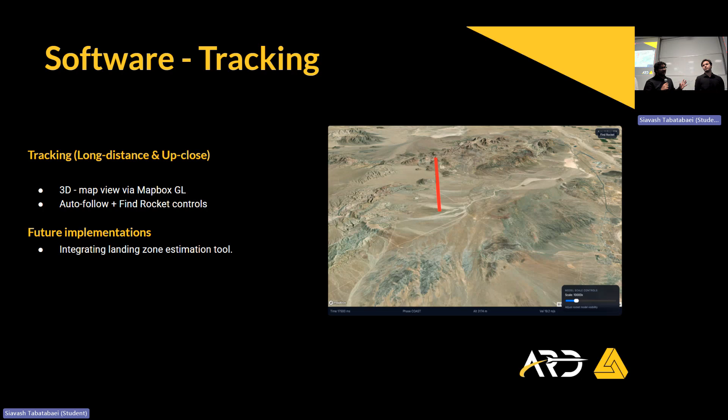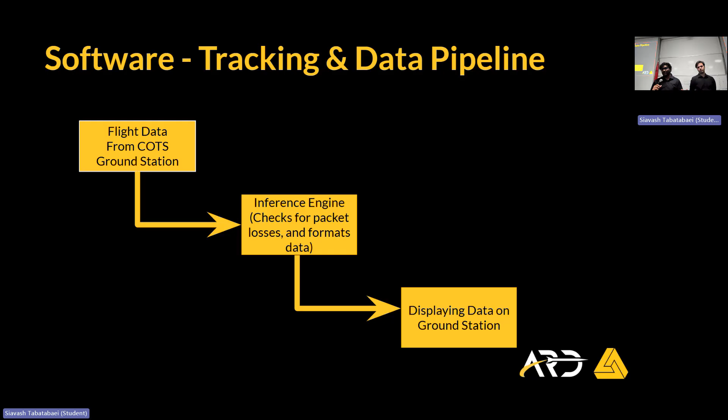We are hoping that we can integrate it with the landing zone estimation tool that we are hoping to build in the future; we have a plan to do it, but nothing is finalized on that part of the project yet. So this is how the data will flow through the system: we get the data from a COTS ground station, and we will have our own inference engine that checks for packet losses and formats the data as we need it. Then we would display it on ground station, and we would also log it locally on ground station as well as on the rocket by avionics.

And this is the future project we have. If time allows, this is what we hope to do: make a predictive recovery system that shows a landing zone with decreasing degrees of freedom.

It was intentional, we swear. Make sure it's on purpose.

So we plan on getting the Whitecliff weather data from their weather station, which will be openly available, and using that and the data from the rocket as the input to make some kind of model that will help us predict where our rocket will land.

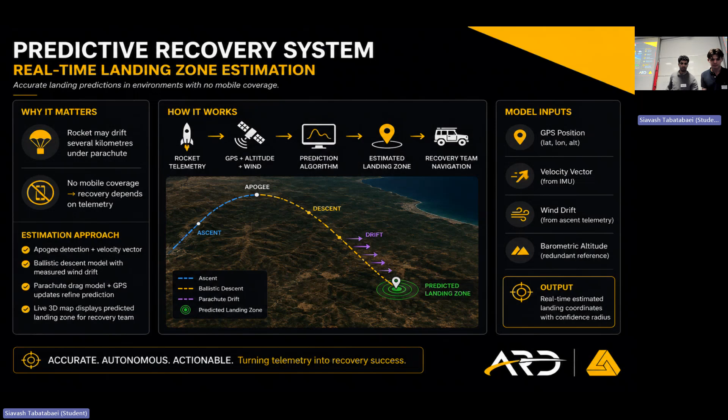And yeah, to remind everyone what a payload is: it's an experiment. We're going to put it inside a CubeSat, and on our rocket, it's going to be within the nose cone segment. According to the AURC rules, it has to survive the flight, it has to be at least 2 kilograms, it cannot affect the launch trajectory or recovery, and it cannot contain any hazardous substances or live animals.

So we will be experimenting on how varying G-load conditions affect water retention. We will investigate the water distribution behavior in soil during the rocket flight, and evaluate how these changes may influence the future of plant growth and agricultural systems in space environments. From this, we created a hypothesis: water retention will decrease during periods of maximum G-loading and distribute randomly during microgravity.

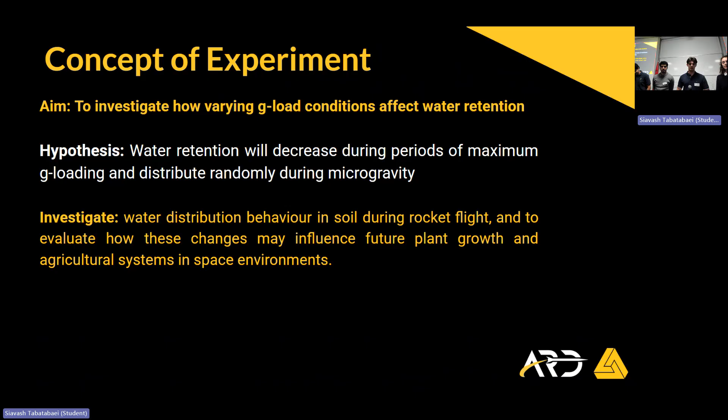To further justify this project, we believe that understanding how water behaves in soil under altered gravity conditions is critical for the future of spaceflight. The ongoing Artemis missions show that the global focus is shifting towards deeper space and long-term missions where nourishment of astronauts is a more pressing issue. So understanding how water distribution in soil, the main factor affecting plant growth, changes in both the microgravity condition and the high G-load condition is incredibly important. Yeah, we'll move on.

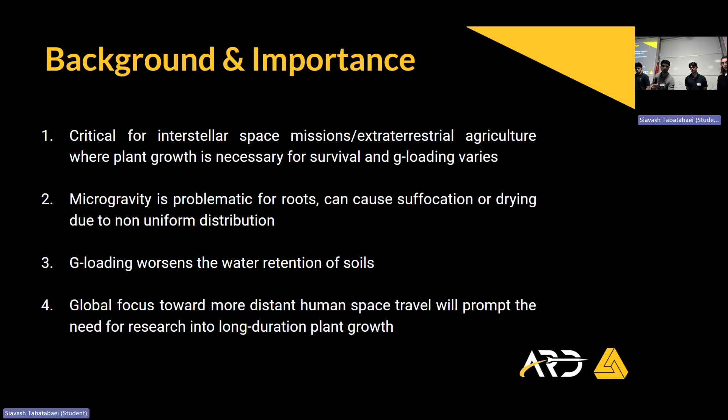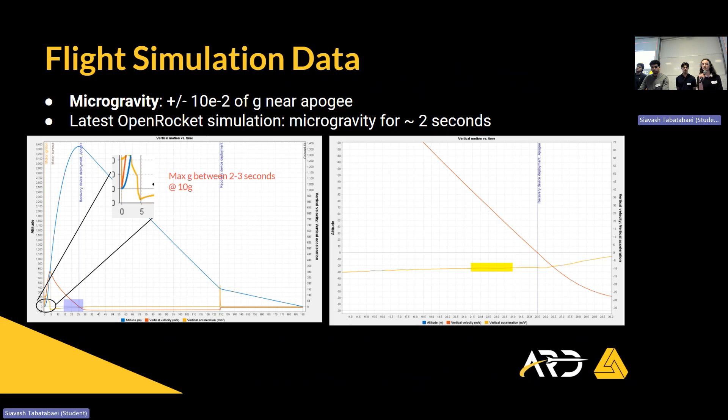Before we conducted any of our research, we did flight simulation in OpenRocket again. We approximated 2 seconds of microgravity near apogee and about 10 Gs of force at the maximum for 2 to 3 seconds, proving that our payload will undergo the various G-loadings for our experiment.

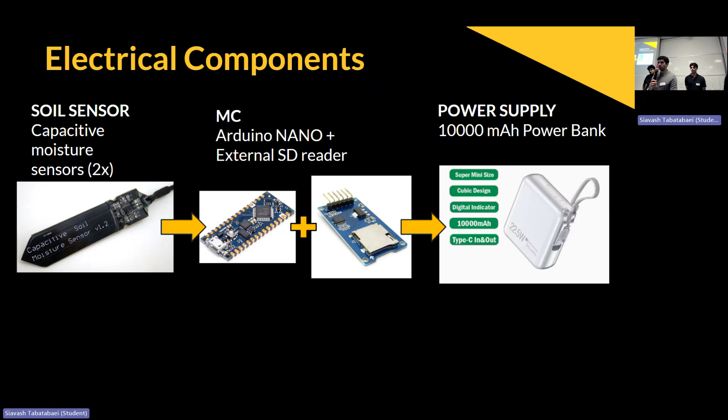We've just got the electronic flow chart here. We're using 2 capacitive soil sensors, which can sense both the intensity of water surrounding them and the surface coverage as a percentage, which is really helpful for us. This is connected to a Nano with an SD card reader, which stores all the data we need. We'll be recording for about half an hour, and a power bank provides ample power. Our power requirements are pretty minimal.

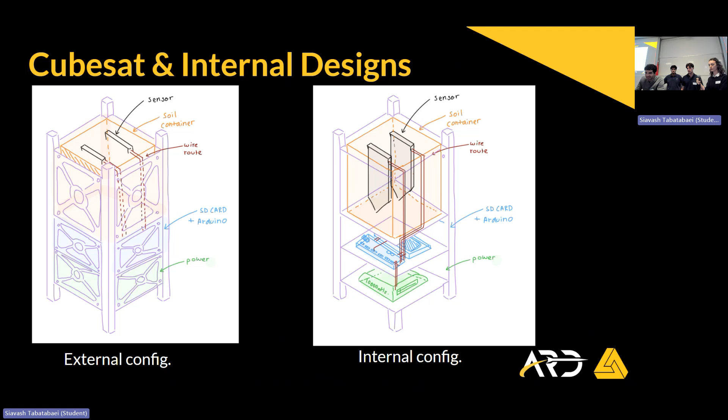And we also have calculated our power budget for our payload. We calculated about 0.175 watts for the Nano and the 2 sensors. So a 10,000 milliamp-hour power unit will be sufficient and provide 171 hours of runtime. But this is a very conservative estimate because we have plenty of room in our 2U CubeSat. So space was an issue last year, but now we have plenty more room to add more batteries if required after testing.

Yeah, so going forward, of course, our actual experiment is in quite the preliminary stages. So I think one of the most important things that we do as a team is testing, whether that be preliminary or continuous. So that includes testing of the sensors themselves, so their parameters, what we can work with, whether they are capable of what we want them to do, and how compatible they are with the kind of programs and electronics that we want to include in our system. Another good thing to know is how resistant the sensors and the electronics are to water damage, planning for the worst possible scenario.

Other than that, we obviously have the soil retention behavior that we need to test. That includes leaking of the soil, pressure testing, saturation testing, also determining a possible saturation level that the soil should be at prior to launch. Even just determining if that's actually really an important parameter that we need to consider to get the kind of data collection that we want.

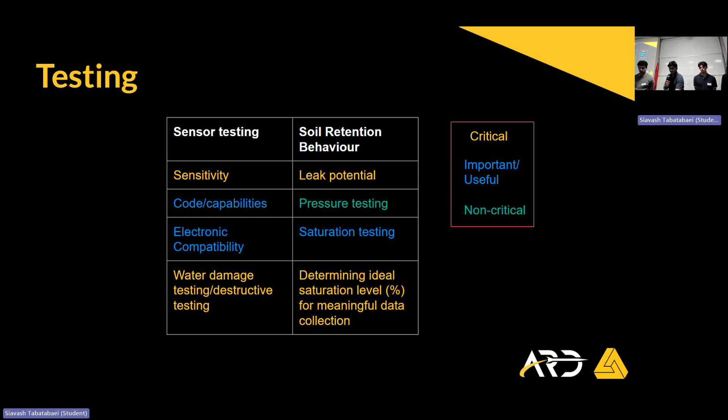And so building on that, we identified quite a few risks and tried to mitigate them as much as possible. The most significant risk being biological leakage. So that just means leakage of the water, leakage of the soil. It'd be kind of funny if after all this, the whole thing fails just because some water touched the electronics. So that involves making sure we have airtight seals, making sure that the little box that we put the soil and water in is all airtight and doesn't let any leakage through.

Another significant risk, of course, is the rail misalignment and jamming. We mentioned that our design of having the guide rails lets us more conveniently put the payload in and out of the rocket. So that gives us convenience on the actual competition deadline. But we don't want that to backfire on us. So we have to make sure that we have a smooth finish of the guide rails and make sure it actually works as we want it to. Other risks include structural failure, of course. So we can do testing on that pretty simply.

Yeah. And so our timeline, we definitely want to go forward as quickly as possible. So we need to finalize our designs, and after that, pretty quickly procure everything that we need. And that includes the sensors, the electronics, everything like that. Hoping to finish on schedule as quick as possible, because payload, of course, we need to integrate that with all the other subsystems. So making sure we have enough time to do all that.

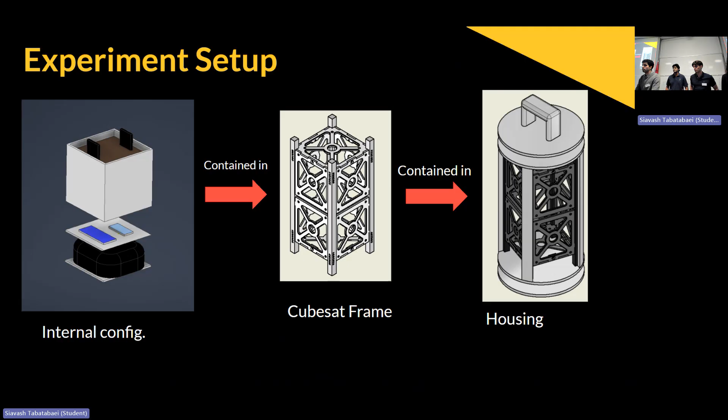how and when are you planning on putting your payload together and verifying that you're getting answers that make sense without just sitting there on a bench, and then do something to it to try and replicate, even at some scale, what you expect to see during flight, so that you can see if you can measure any changes? So like run a test on the ground before you send it up, sort of thing.

Yeah. I guess after we assemble the entire unit is when we can start testing. That's actually not true. We can start testing with just the soil cube, and just some on-the-table testing, but motion testing will have to come after the whole unit's assembled. That would definitely be something we will consider.

Yeah. Well, in terms of questions to us, I have a suggestion for one of them: what would be considered a strong ground control experiment? If you just leave it still, you should see some gravitational effect on the water. If you gradually rotate it about 3 different axes, you'll get a sort of time-averaged gravity vector, and that should be roughly equivalent to what you see in zero gravity. Just have it there for 5 minutes, and then there for 5 minutes, and then there for 5 minutes. There's actually a name for the product that does that.

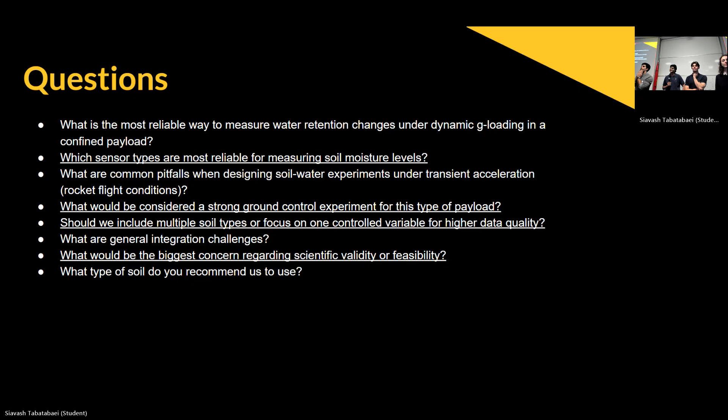Sorry, I've been doing a lot of work with Plants for Space. You want to get in touch with Maddie Parks, and it's a clinostat. They have a gorgeous little design that you can build in nothing flat. Plus Maddie's really cool. So yeah.

Another wacky one out of left field. If you look at the biosecurity regulations about taking soil samples in South Australia, because there's various restrictions about taking soil on or off places like vineyards and orchards, you might want to have a look at randomly bringing soil around because of various soil fungi and pests and the like. There is a quarantine station on the way there, the one I'm thinking of out near Paringa, near Renmark. They generally keep an eye on people going into the Riverland rather than heading out towards that little corner of Victoria on your way to Mildura. But yeah, it's a security thing to have to think about.

As I recall, I think they had more concern with bananas. Oh yeah, definitely. But heading into the Riverland, that's the important thing to care about. Heading out into Victoria, well, that's somebody else's state. Thank you.